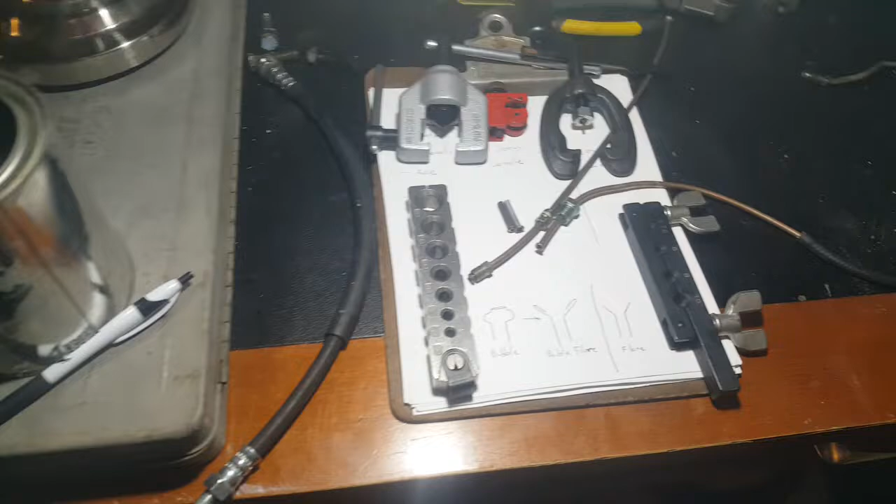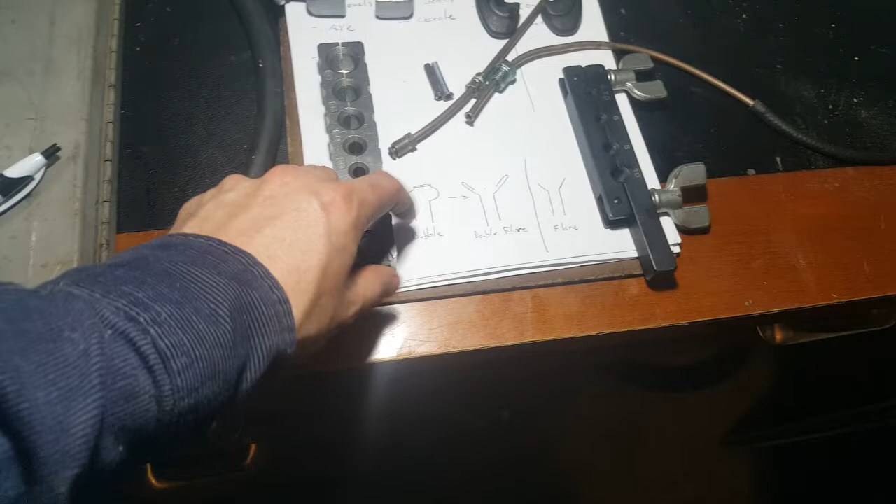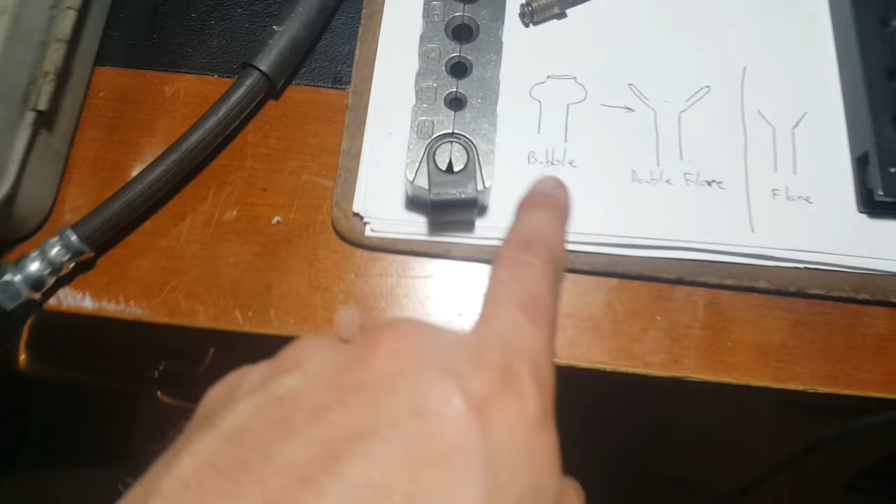Alright, so I'd like to do a quick short video on brake system flaring. So first of all, there are pretty much three kinds of flares, and well, I guess one of them isn't really a flare. No, they're all called flares. Okay, yep, I take it back. They're all, yes, three kinds of flares. So that's my sort of rough diagram there.

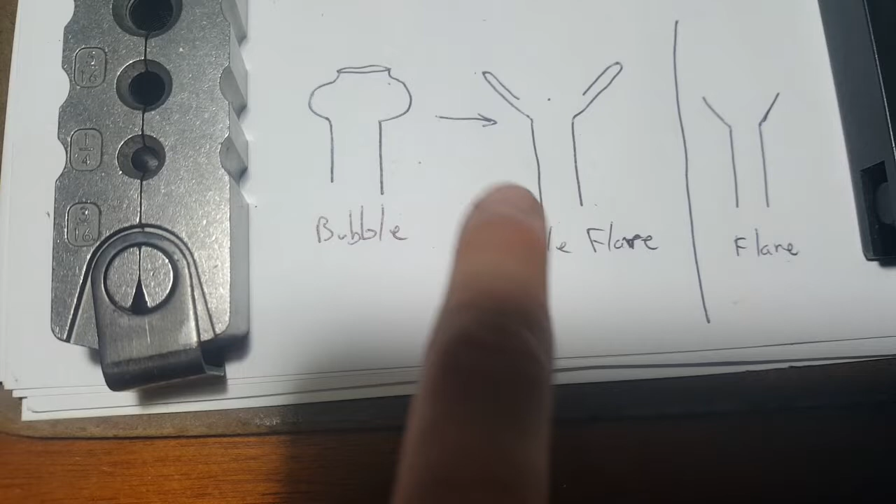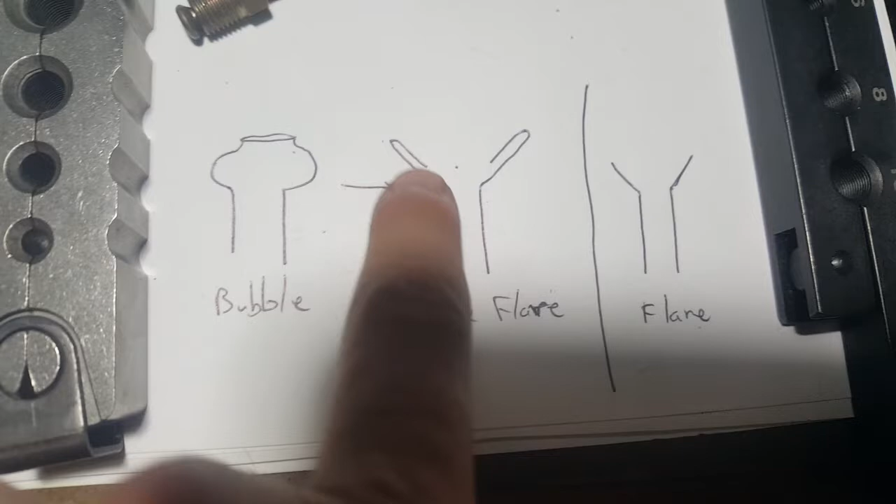That's a bubble flare, and as the name suggests, it looks like a bubble. The other one is a double flare, because you can see there are pretty much two walls. So that's a flare, and a double flare is pretty much a flare with an extra flare on top of it, a folded in flare. Basically, it's reinforced. And since there are already other videos out there, I'm not going to spend too much time on the details of the procedure, but I will tell you a small difference.

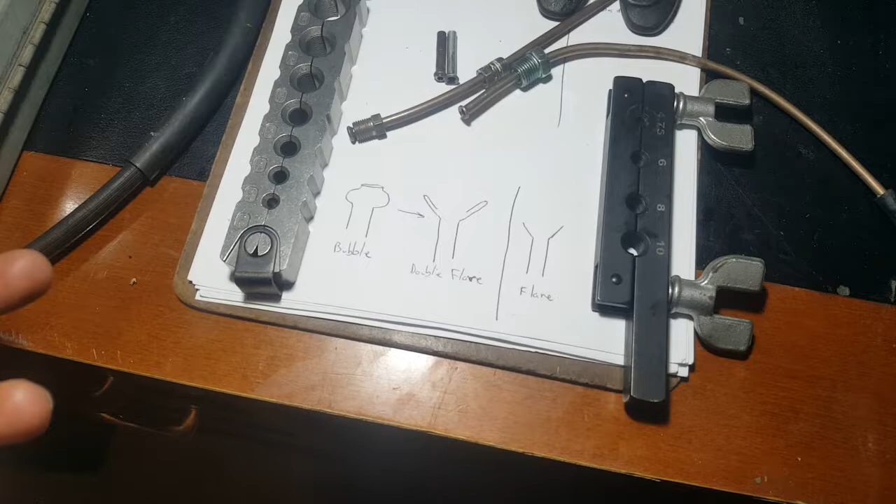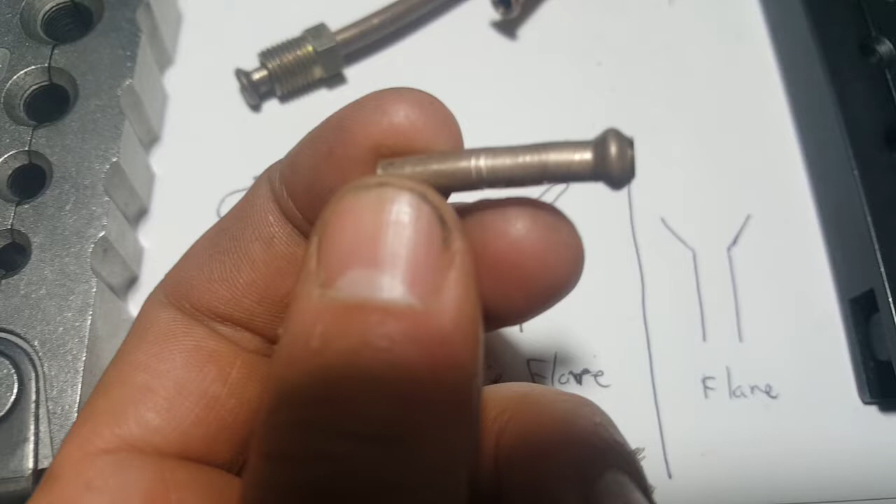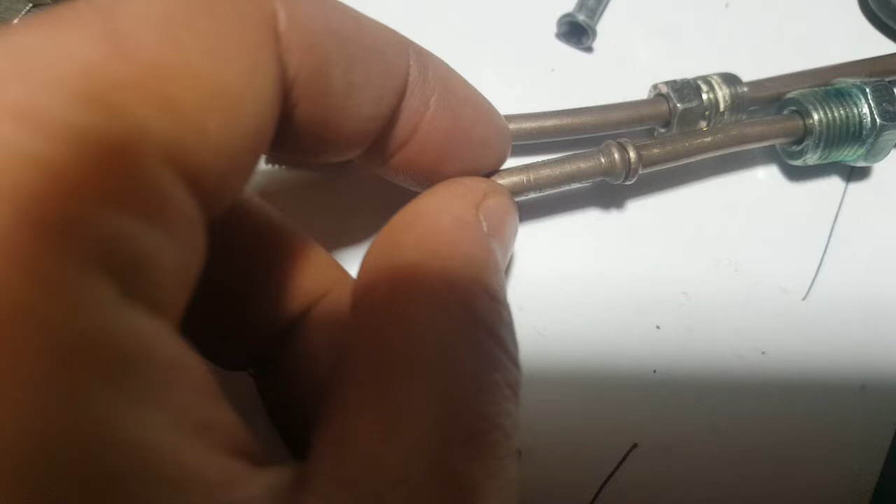What I'm using is a normal bubble flare toolkit and a pipe flare from Home Depot, or Home Depot Auto Parts, as I like to call that place. So I guess the first thing you have to decide is which sort of flare you need, and that's what a bubble flare looks like. I'll admit it's a little bit rough, and as you can see, the bubble flare is pretty much the male, and the flares are like females. So it fits inside the other.

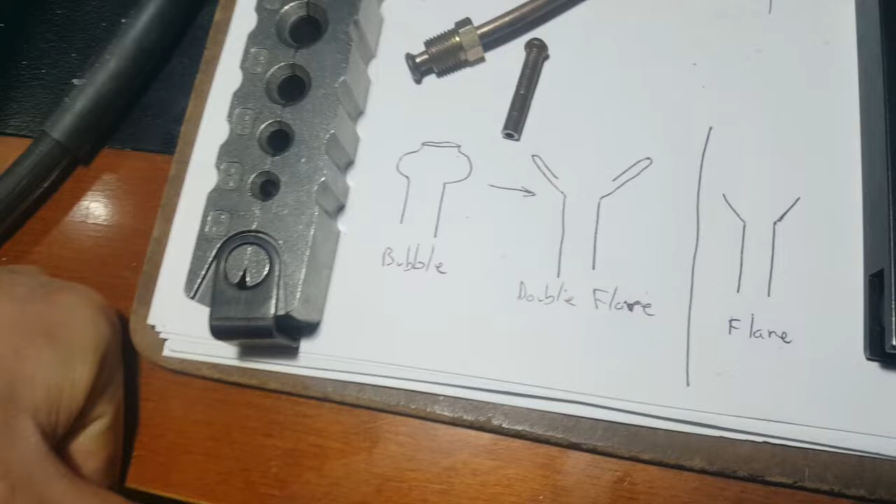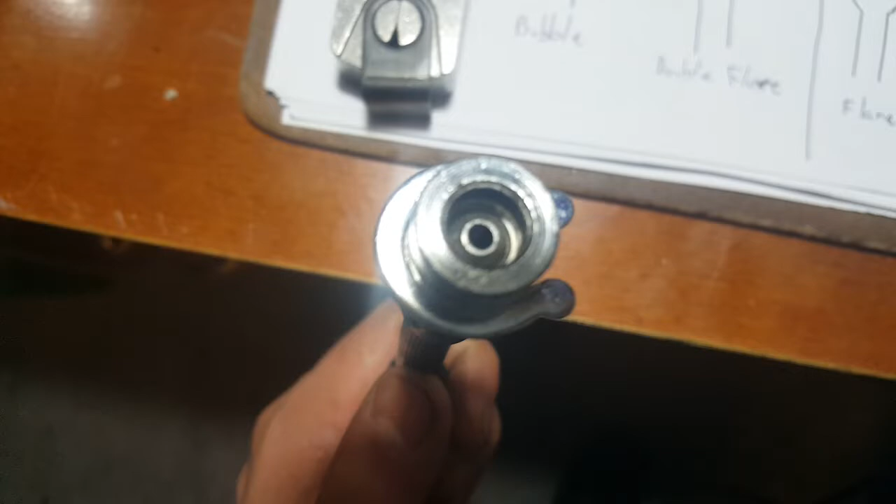And the fittings, so you have to look at which fittings you use. So in my case, I'm going to install this pipe here, and you look inside. And as you can see, that's a male flare there. It's a bubble flare. Consequently, I have to use a female, which is, in my case, a double flare. So bubble flare and double flares are standard for copper and steel. And to the best of my knowledge, flare is used more in plumbing for like big pipes. So you could even use like a 5/8 diameter pipe like that.

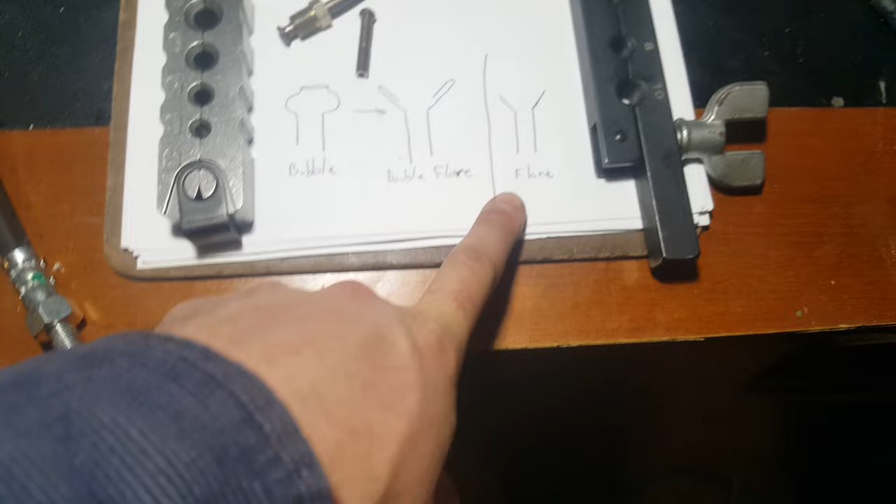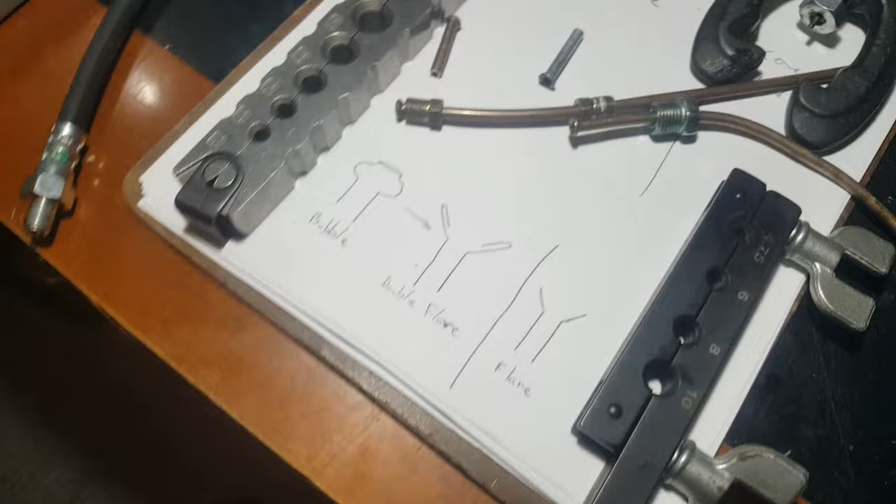And if I'm not mistaken, please don't quote me on this, it's used on stainless steel pipes. So stainless steel is a lot harder. It's the hardest of all the three materials. So you can't do a double flare on stainless steel, if I'm not mistaken. So this line here, as you can see, it's a copper nickel brake line. I love this. It's rust proof, and it's very easy to deal with. It bends easily, and it flares really nicely. The steel, this one here is a typical steel line, and it's a bit harder to work with, and it rusts out, right?

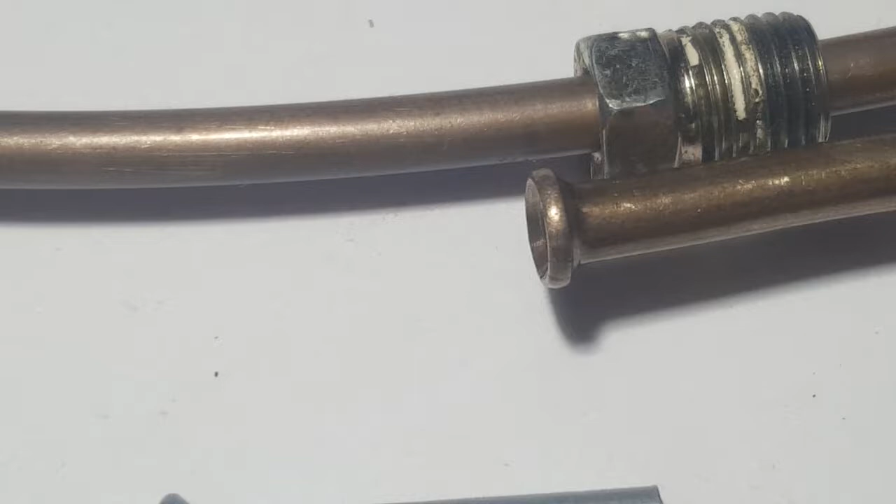So I'd like to show you that my flares are good. So this is a store flare. This is how it comes if you buy it. And as you can see, that's a double flare, and that's the one I made there. Oh, where'd it go? There. So not bad at all, I don't think. So the right is the one from the store, and that's the one I made. So not bad at all.

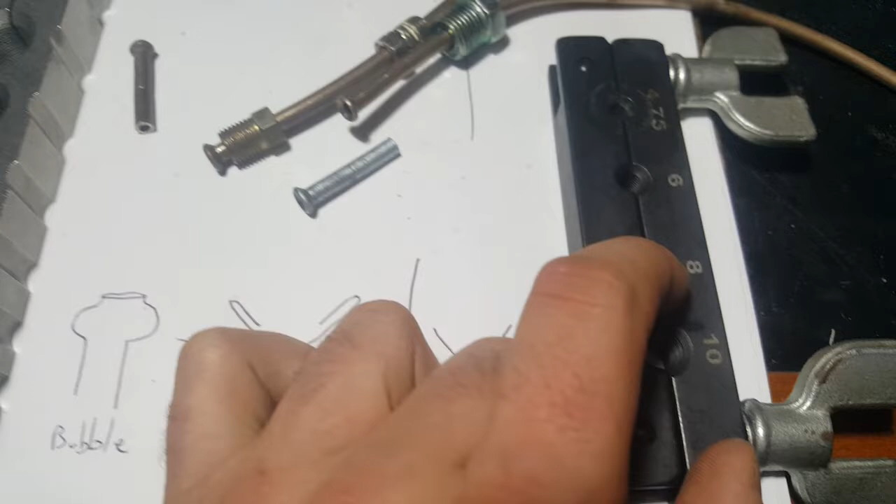But yeah, in the videos I've seen, people have pretty much the toolkit in one. So to make a double flare, you have to start off with a bubble flare. So you use this kit here. I use this one here. That's the one I have, metric bubble flare kit, and it has these dies, and you choose the right die for the correct pipe size. So that's 3/16 or 4.75 millimeters, 6, 8, and 10. So 8 and 10 would be for like fuel lines and transmission oil cooler lines.

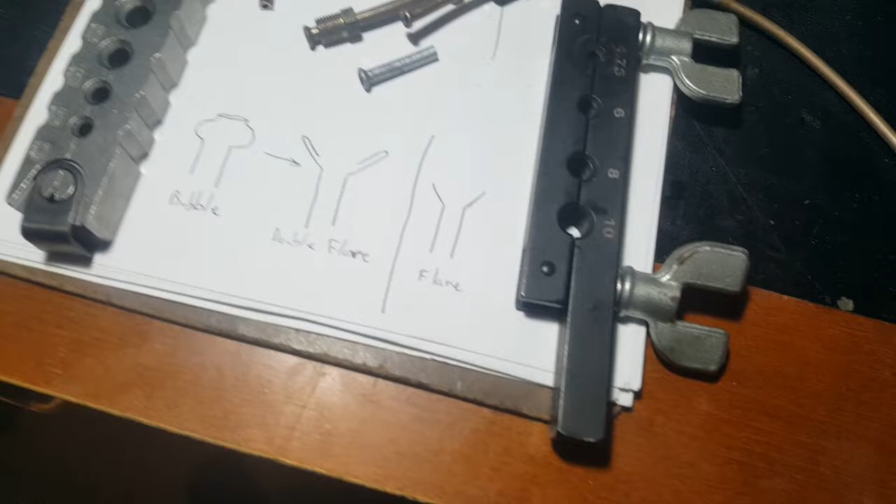And then, so I do the bubble flare with this, and again, you stick the pipe in there, and some people like to chamfer them, and then I've seen even some people filing it. I don't do that. I don't think it's necessary. My flares just turn out just fine, and I find that sometimes it works best that way. But anyways, like I said, with the steel pipe, it's a bit more tricky. You have to play around with it, and with the copper nickel pipes, it's a lot more simple.

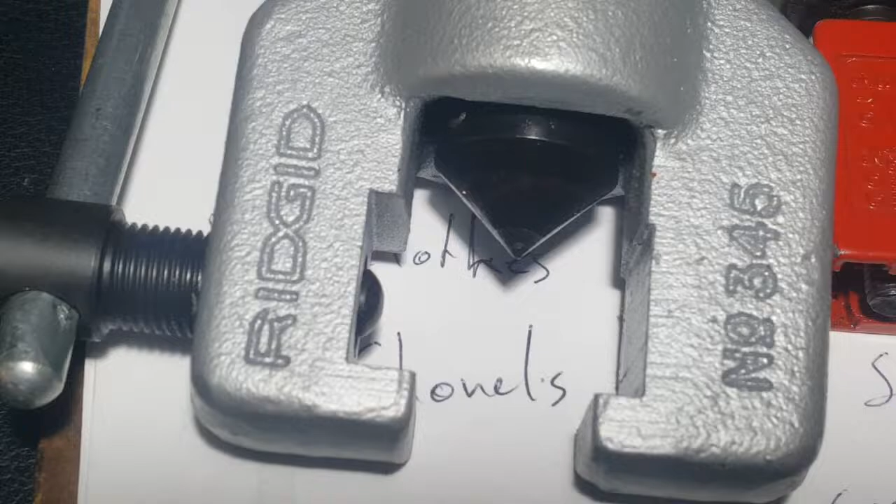But anyway, so I started off with the bubble flare, this tool, and then once I bubble flare it, I get something like this, then I just put it inside here, inside the flaring tool, and that's what it looks like. It's just basically a big triangle, and it forms that shape there. You put it in and then you flare it, and that squashes that upper part down, creating that second flare.

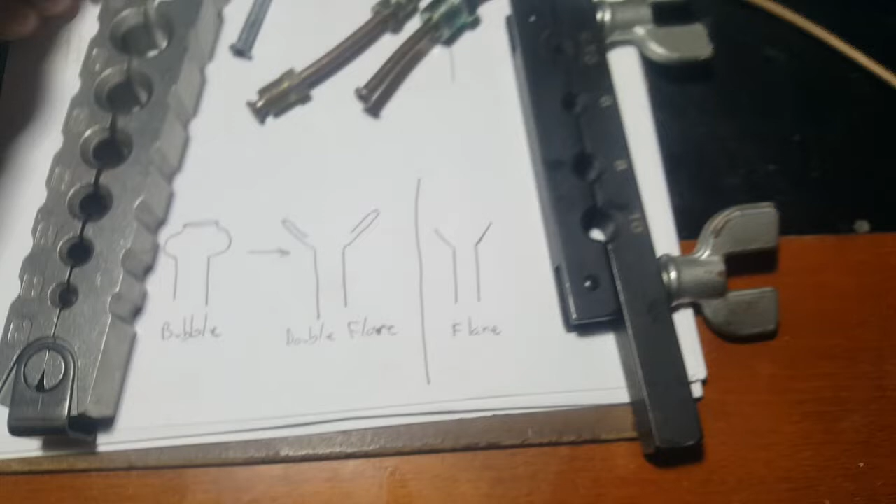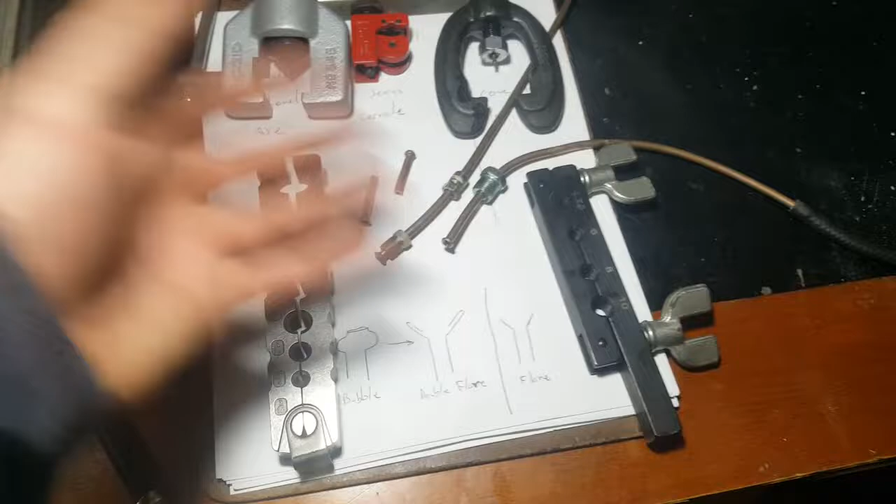So for anybody that's doing brakes out there, here's an alternative to buying a flaring or a double flare kit. So if you go to the auto parts store, if I'm not mistaken, a double flare kit is very, very expensive. And I'm just showing you that you can do the same thing with a normal pipe flare. That's all it is. It's just a pipe. There's no such thing as an automotive pipe, and they're just pipes, right?

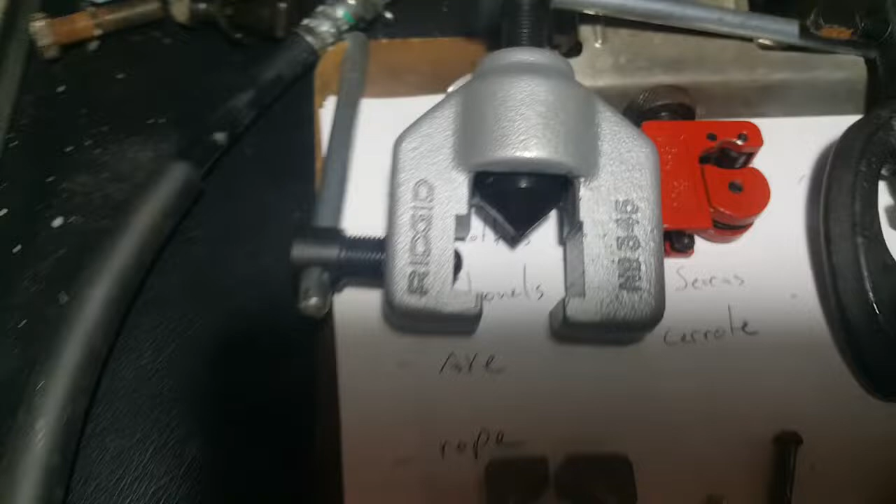So I'm showing you how you can do the same thing, the double flare, with the pipe flare tool from Home Depot. And that happens to be a Ridgid number 345. So yeah, I just thought this would be interesting. Anything else I should say? Yes, you always have to remember to lubricate just a little bit, just a drop of oil on the tips for each flaring action.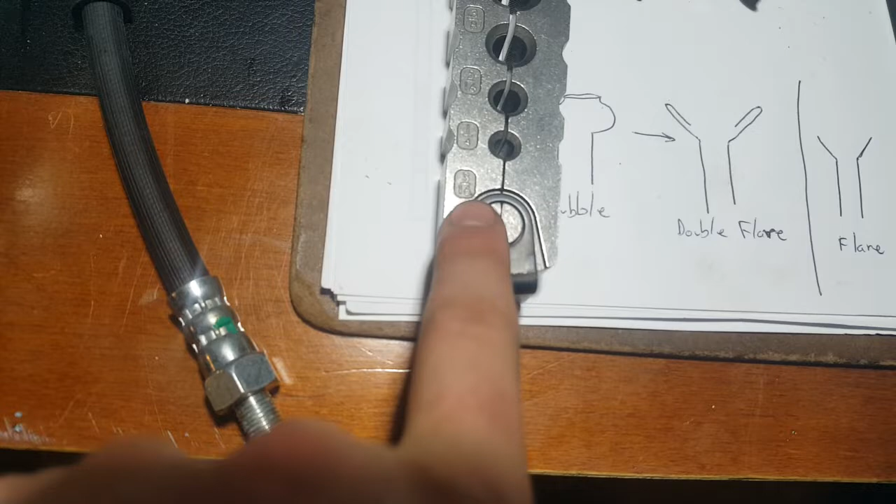There is no difference with a metric. Just that one happens to say metric, but the metric still uses a 3/16 pipe. That's what 4.75 millimeter is, 3/16 of an inch. So this one, it actually says 3/16 there, and the pipe fits just perfectly here. So just in case you're wondering.

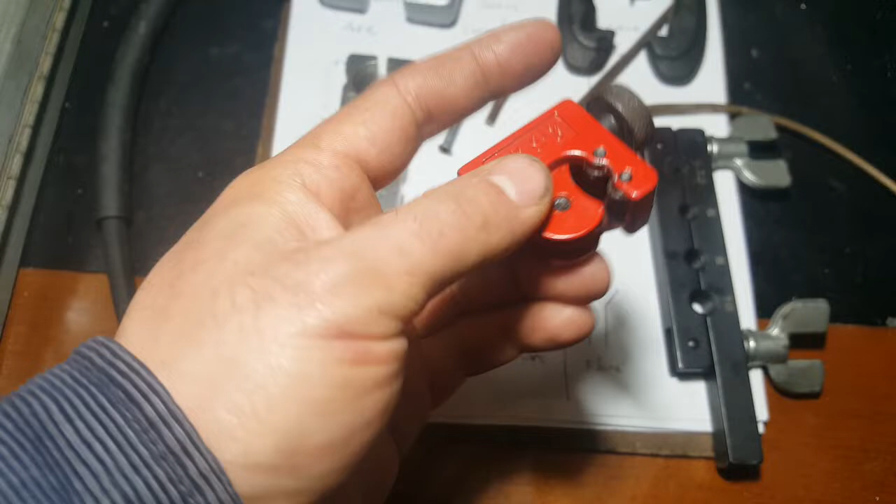Yes, this other thing here. This is a little pipe cutter. It's a little thing. And this is a must. You really need to have this little tool here. Now, if you try to cut these things by hand with like a hacksaw or something like that, you can do it, but it's just a lot more work, and you really have to know what you're doing more. It's more difficult. So anyways, again, I hope this helps. Again, how you can do all three types of flares using a normal Home Depot flare tool and an automotive brake line flare tool.